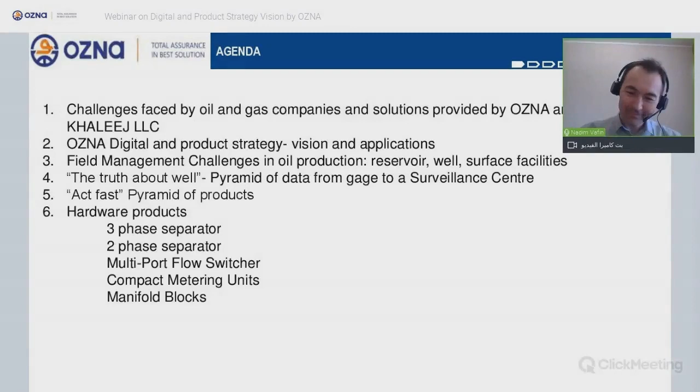What is OZNA? OZNA was established in 1953 in the Soviet Union to serve the oil and gas industry, and it was simply manufacturing metering units. But today it has grown considerably, and it has more than 2,700 employees, out of which almost half are engineers, and out of which half, about 30%, are software engineers.

So we have four main divisions: fluid metering, fluid treatment, modular units, and pumping. And on top of that, we have product digital solutions.

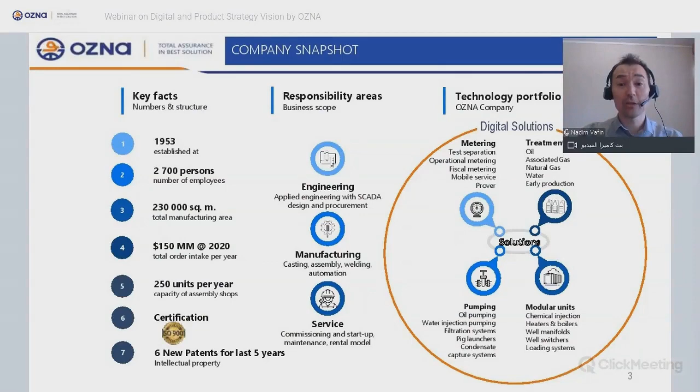In Russia, we hold about a third of the market share for metering units. We serve all major customers in Russia and the CIS, like Gazprom, Lukoil, Rosneft, Sakhalin Energy, ConocoPhillips, Total. Our headquarters is located in Ufa, and we have 9 regional offices.

The reason is because we want to be as close to the customer as possible. Now we feel strong enough, and we decided, okay, we want to go to the international market, and we implement the same approach. We want to have a local partner which is close to the customer office, for a number of reasons.

If you're close to a customer, your communication channel is very short. You can respond to queries very quickly. If you want to visit a customer, you just go to the office, and most of the issues get resolved in a much faster way. Plus, it's cheaper if you have an office close to the customer.

And how we did it - we also wanted to work with a partner who can help with the technology export. Our partner in Oman is Dohat Al Khalij.

There are a few key milestones. We first met this company at Oman Expo, and that's the reason we are holding this webinar on the Oman Expo platform, and we have a stand at Oman Expo with our partner, basically joining our business in Oman. So we met the DAK guys at Oman Expo. We invited them to the OZNA facility in Ufa. And the following year, OZNA personnel went to Oman to get to know the local market and the Dohat Al Khalij facilities. And then we signed the agency agreement.

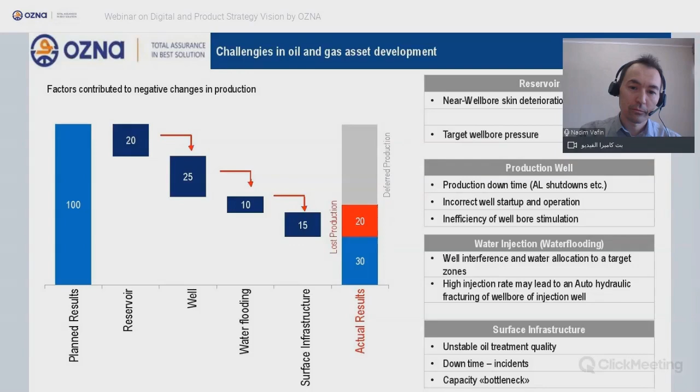So why do we talk about digital? Well, digital oil field is basically the term that everyone in oil and gas uses these days. But was it true? How do we see it? In OZNA, we see that digital instruments and tools help you keep your asset at optimum level, 24 hours per day, 365 days per year.

Effective fluid and field management, as per our view, stands on 3 blocks: data, algorithms, and human and machine intelligence.

But once you have all the data and clean it up, you need something to process the data, and this is algorithms. For algorithms, you have input and output, so the quality you put in is the quality you get out, and the cost of algorithm processing. You need IT software engineers, mathematicians, reservoir and production engineers to design the algorithm, test it, and run it, and it's very expensive.

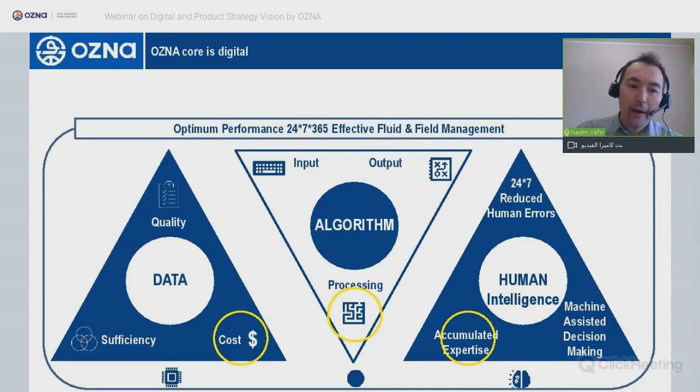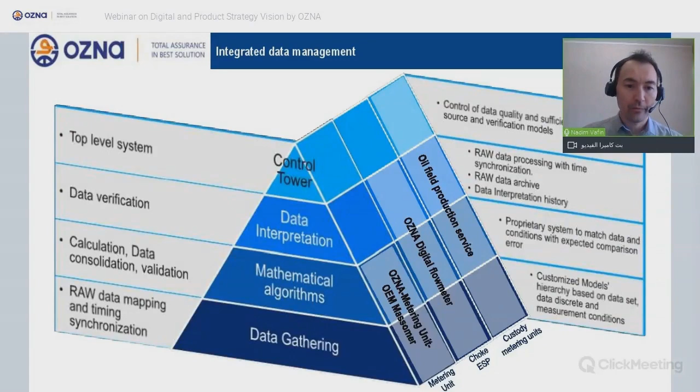And why did we create this? How would it work? What is the situation today? So the next slide: do you know that in Russia...

One well is under metering only 3% of the time. Yes, it's only 3% of the time because of well pad drilling. We have like 14 to 25 wells and 1 metering unit that cycles through each and every well. So basically, 97% of the time, the well is monitored via the wellhead gauge or through the ESP data.

Whenever there is a problem, despite the high level of development of IT tools, every user generates his own data set to analyze the well performance if needed. Well performance and intensification assessment is based on expert opinion, and it takes time.

You know that in data mining, about 80% of the time goes to data quality and data cleanup. In most cases, if you want to know what's going on with the well, you make a field visit because you want to see it with your own hands.

And we thought, okay, how can we solve it? So we selected two areas. First of all, you want to know the truth about the well: what is really going on?

And the way you need to know it is to have all the information on hand, all critical information, clean and verified information. This comes to a second point that allows you to make very quick decisions, because your attention is focused on the very critical wells, for example, on shutdowns, the wells that underperform. So you focus on the critical tasks and wells that affect your production.

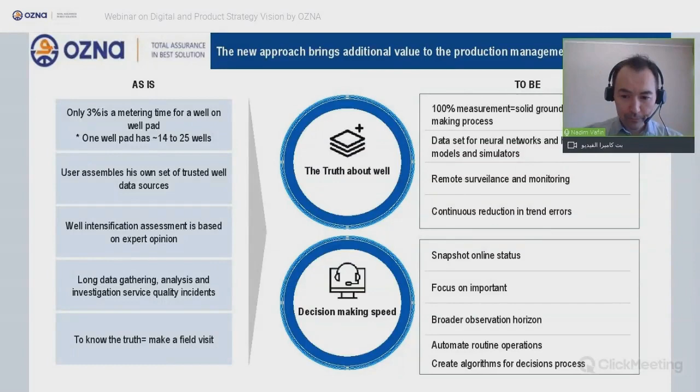Now, how does it work in reality? Because I said we are focused on from the wellhead to the custody point, what problems do we see in the surface facility infrastructure? As a bottom line, we think that surface facility infrastructure is basically underloaded, loaded only 50% of the time, which means you have huge room for maneuver.

For example, for the operational mode, you need to count the fluid time in the separator, fluid phase state in pipelines, chemical treatment, temperature controls. The pumps can give you problems with performance, right?

Oh, what's going on? I just lost my presentation again. Okay.

Then we have the unstable technology regime when we have different phases, and then we have equipment downtime. So basically, we are losing about 50% of the capacity for the surface facilities.

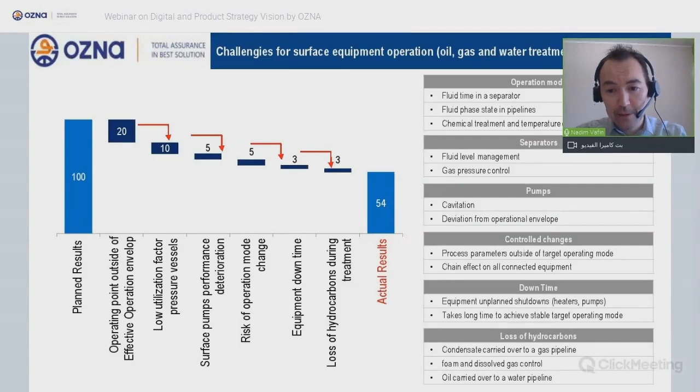The next phase is semi-automation, when you have a human-machine assisted system that tells you, okay guys, you need to change this point and this point, and then you can improve your performance. The next level, which we call full automation, is when the system readjusts itself automatically based on the input parameters.

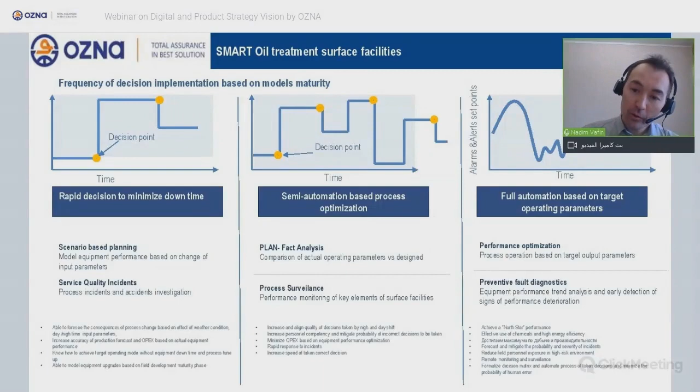And why do we think this can work and we have the capabilities to do it? Well, because today we have these capabilities. We actually do it, but we call it today as reengineering. We assist our customers to enhance surface facilities performance - we remove the bottlenecks, we upgrade them, we basically fit them to the current conditions.

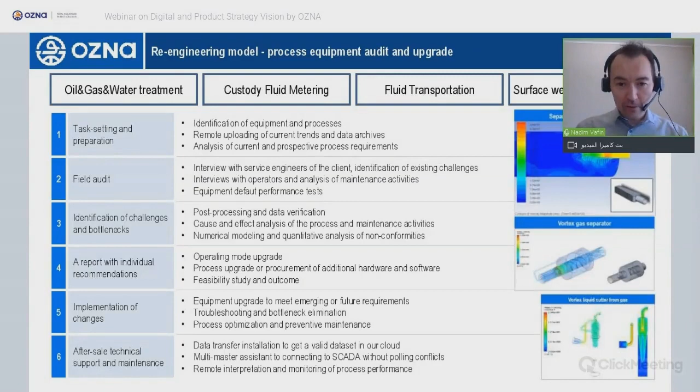Another product that we have today, on the run, is called digital passport, where all documentation for the equipment is located in one place, and it helps field service personnel, maintenance personnel, or engineers from the remote monitoring center go exactly to the point and see where the problem is. This is a ready product.

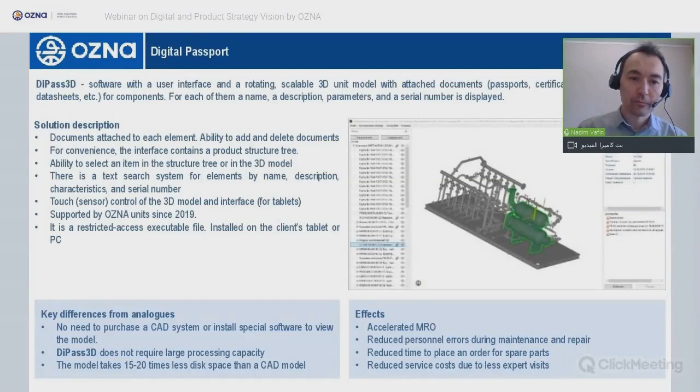And the next product we call virtual flow meter, where we have well monitoring and well surveillance at all times, 24/7, because as I said, every well is only about 3% of the time under metering conditions, so 97% of the time we do it using digital tools.

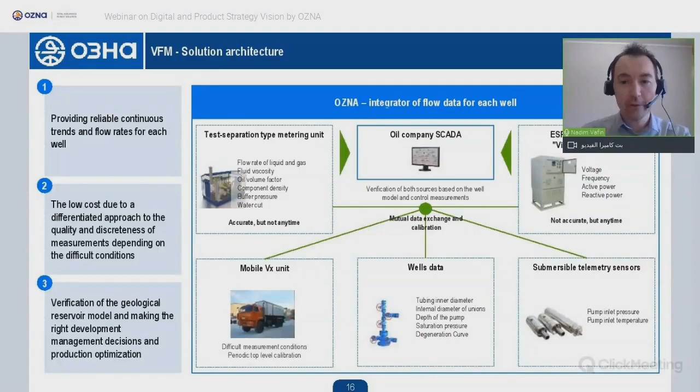And the combination of hardware, digital passport and digital model gives you the equipment digital twin, which is basically a building block for the digital oil well and digital oil field.

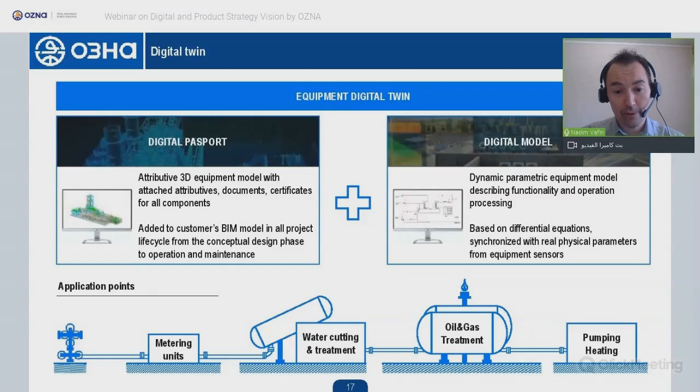Now let's change gears and see what we have on the ground. Today we have a number of hardware products we are promoting in the international market. The first one I want to talk about is a multi-port selector valve, which is used to direct the flow from the well to a metering unit and let other wells flow go to the production pipeline. This MSV is quite popular in Russia and is becoming popular in the Middle East.

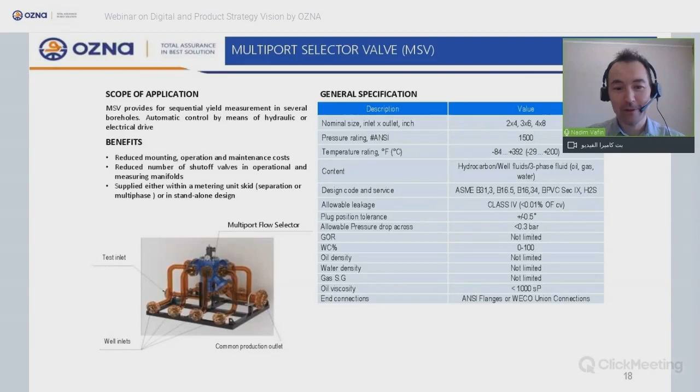The next product I want to talk about is a compact size separation and metering unit. This unit is very compact - you can move it using a light truck. You don't need external power, you use solar power to power it up. You can connect it to the OZNA remote engineering center, where our engineers will check the settings and adjust the operating mode, so you can operate it in an efficient way.

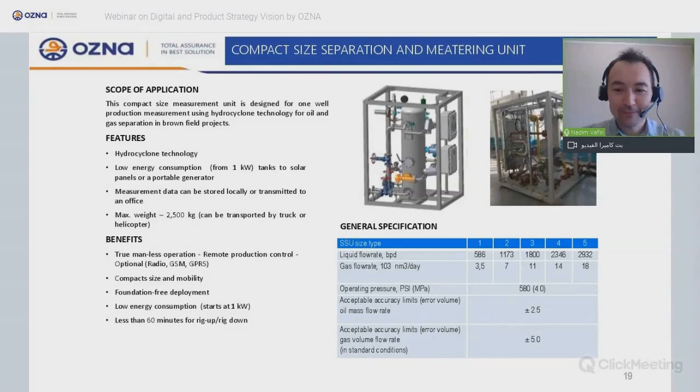And of course, the classic one, which is the three-phase separator - a standard product, and we're actively promoting it in international markets.

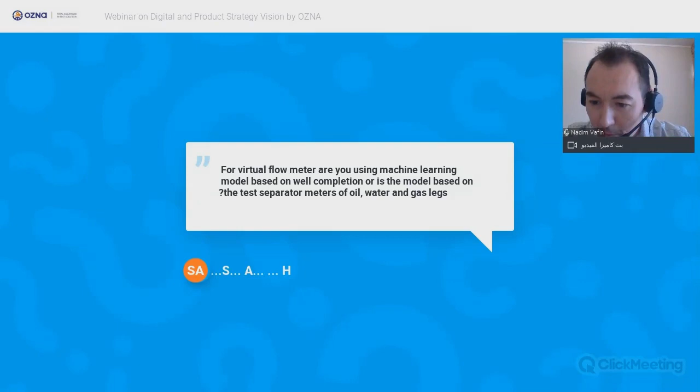Next question: how much cost is reduced by using a multi-port selector valve? When we compare this valve structure, it's about 30 to 40% reduction compared to the classical tubing layout.

I think I don't see any more. Let me see if I missed any questions at the top.

The next question is: does the virtual flow meter model sit on an edge device or in the cloud in Russia? Classical question. We have two solutions: we have the OZNA cloud solution, and there's an option for this engine to be based on the customer server. Basically it's a packaging, a box application. Yes, it's two options.